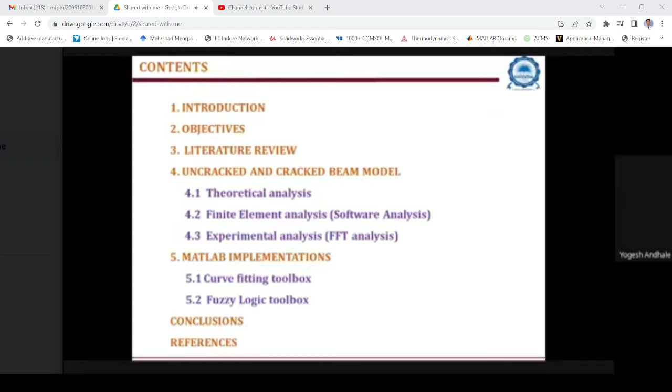So these are the contents of my presentation. Let's see one by one.

First, introduction. Beams of different materials like aluminum, iron, steel, and fiber reinforced composite material are widely used for structural purposes in civil, mechanical, and other engineering applications.

Crack or damage is an important phenomenon which needs to be studied closely for the safety of structures. The presence of a crack in the structure reduces the stiffness of the structure, which in turn reduces the natural frequency of it.

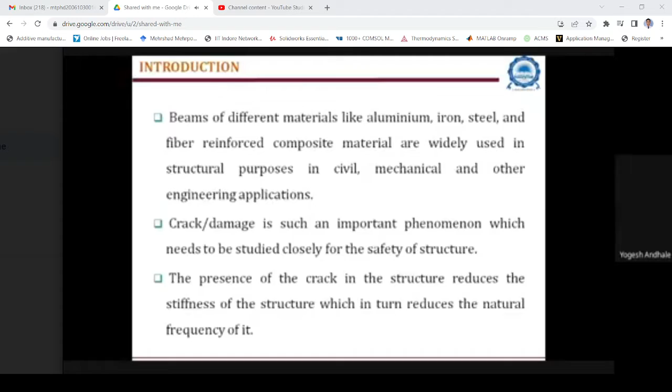The number of cracks present in the structure, the position of those cracks, and depth of the crack are the important parameters that change the natural frequency of it.

Detection of crack is necessary to ensure that the structure is free from any defect or not. Various techniques are adapted for the prediction of crack location, crack depth, and crack size.

The finite element method is considered as a mathematical tool for the analysis of complicated structures. In this study, a total of 10 beam models have been studied for natural frequency analysis, having different crack depth and location, calculating the natural frequencies of various beam models using Euler's beam theory, FEM, and FFT analyzer.

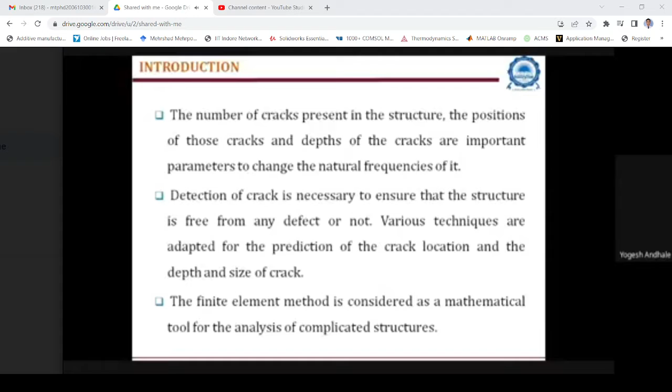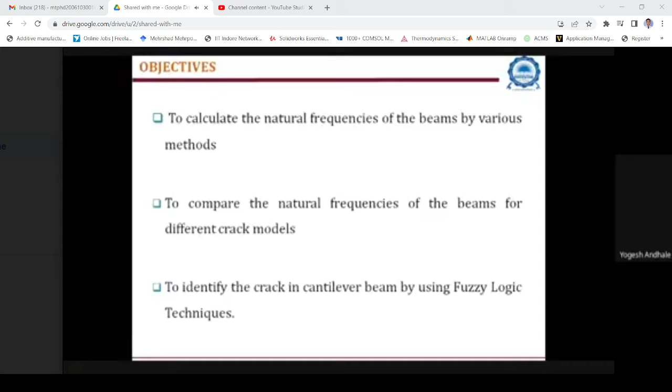These are the objectives of my project: to calculate the natural frequencies of the beams by various methods, to compare the natural frequency of the beams for the different crack models, and last, to identify the crack in a cantilever beam using fuzzy logic techniques.

This is the literature review. First, Pawar et al. used the genetic fuzzy system for damage detection in beams and helicopter rotor blades. The merit is that genetic fuzzy logic is an alternative to other techniques, and the demerit is that it gives only approximate solutions.

Similarly, Nahvi et al. in 2005 used crack detection in beams using experimental modal data and finite element models. Charanjena et al. in 2012 used fault detection of a single crack beam by theoretical and experimental analysis.

The merit of this methodology is that he located the size and depth of the open crack in the beam and used different end conditions. However, he did not use FEA analysis.

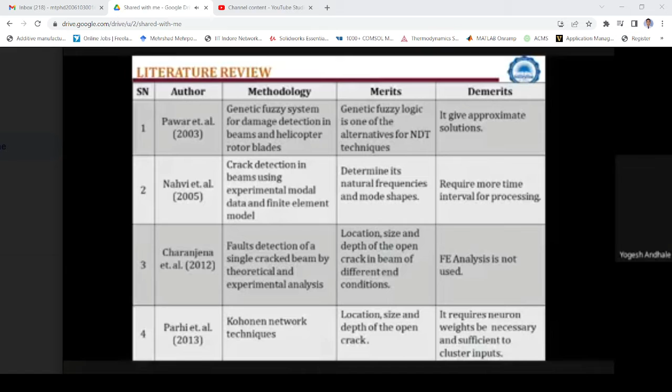Parhi et al. in 2013 used Kohonen network techniques to get the location, size, and depth of the open cracks. The demerit of this methodology is that it requires neuron weights to be necessary and sufficient to cluster the inputs.

So these are the uncracked and cracked beam models. You can see here the cantilever beam with the transverse edge crack is clamped at the left end and free at the right end, with some cross section and length, as shown in figure 1 and 2 — uncracked beam and cracked beam.

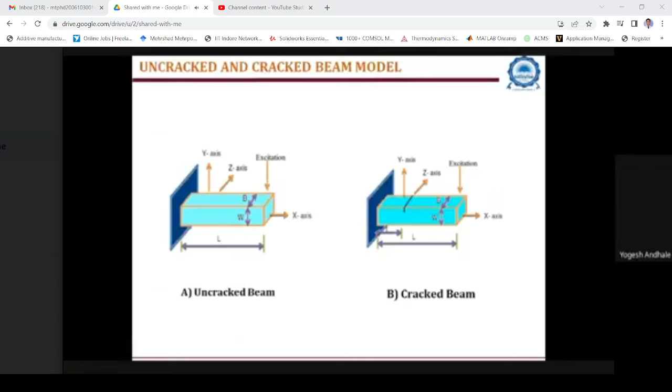In this particular case, the crack is assumed to be an open surface crack and damping is not considered. This is the general equation for transverse vibration using Euler's beam theory.

Here E stands for the Young's modulus of the material, I is the moment of inertia, A is the area of cross section, and L is the length of the beam. C is the constant depending on the mode of vibration.

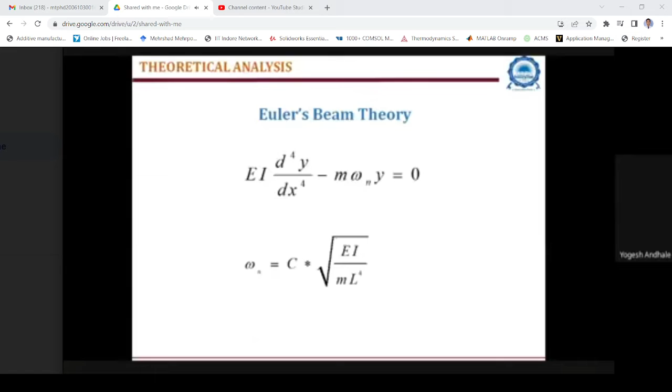The constants are C1, C2, C3. The C1 value is 0.56, C2 value is 3.52, and C3 value is 9.82. By using this equation, I found the different modes for the cantilever beam.

10 models have been studied for the natural frequency analysis, having different crack depth and location, and I calculated the natural frequencies and mode shapes for the beam models using the beam theory equation.

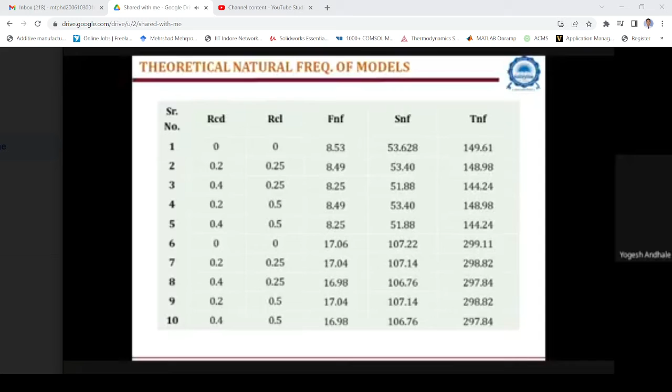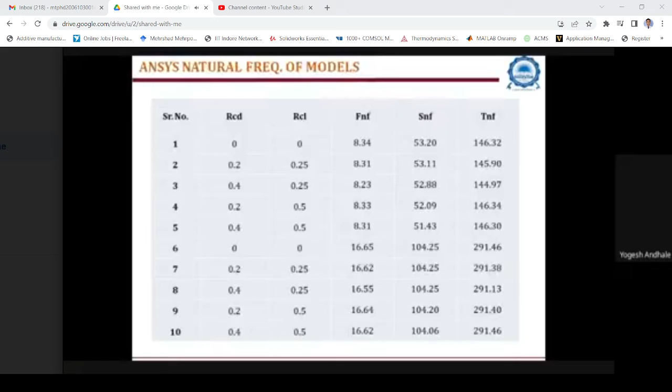Next, I used FEM or FE analysis to calculate the natural frequencies, and these are the results of FE analysis. Similarly, I used an experimental setup to calculate the natural frequencies, and these are the results.

So you can see the comparison of natural frequencies by three methods: theoretical, FEA, and experimental analysis. I used 10 models and calculated RCD, RCL using the first, second, and third natural frequencies for the three methods.

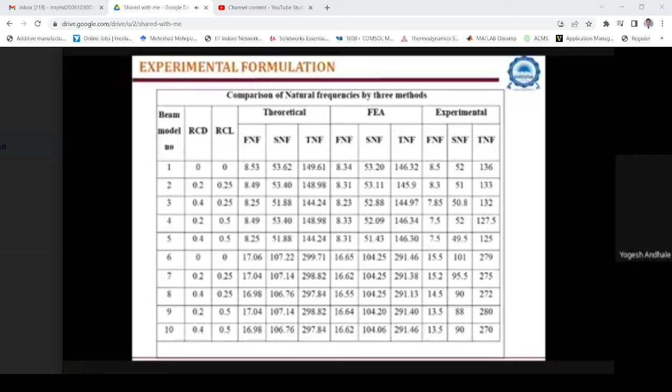Next, I used the fuzzy interface system. In that, the input is different modes of natural frequencies to the fuzzy interface system, and the output is crack depth and crack location.

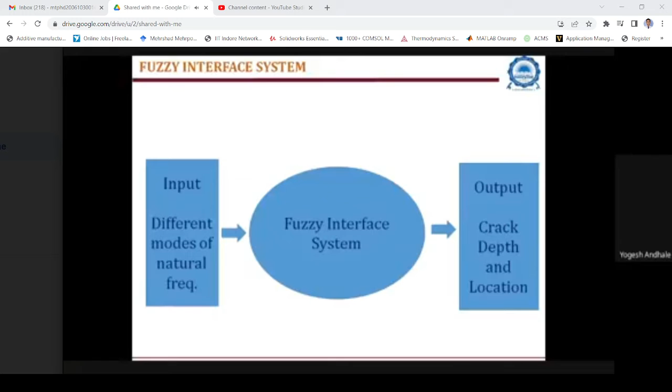The steps for the fuzzy model are: first, fuzzy inputs; second, apply the fuzzy operator; third, apply the implication methods; fourth, aggregate all outputs; and last, defuzzify.

So here is the fuzzy controller. I give the first, second, and third natural frequency as input, then it gets fuzzified, then the fuzzy controller applies if-then rules, then defuzzifies, and I get the output: RCL and RCD, that is relative crack location and relative crack depth.

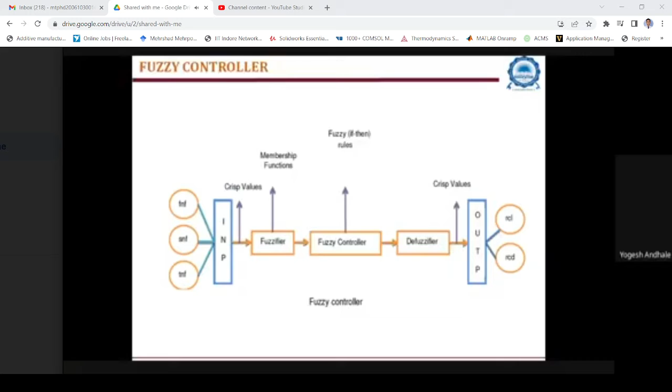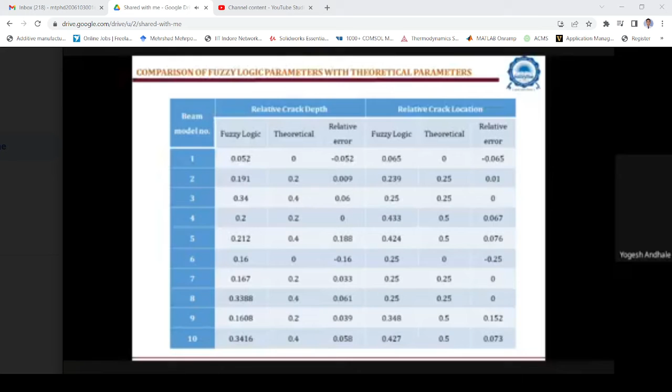These are the comparisons of fuzzy logic parameters with the theoretical parameters. We can see the results are mostly the same between theoretical and fuzzy logic, with some relative error of 0.052 or 0.009, but results almost match each other, with less than 10% deviation.

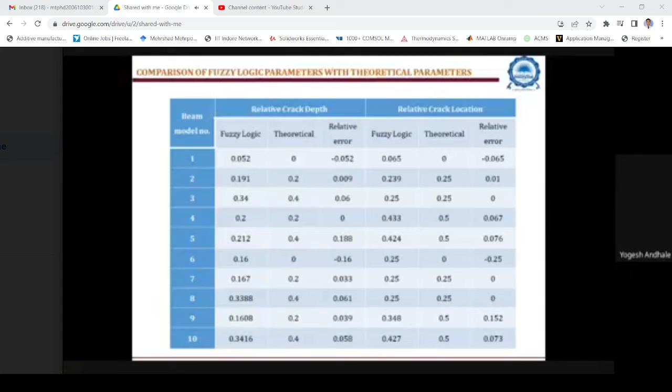In conclusion: calculation of natural frequencies of the beams was carried out successfully. Comparison of natural frequencies obtained by the three methods was done successfully. And last, crack can be identified by using the fuzzy logic technique.

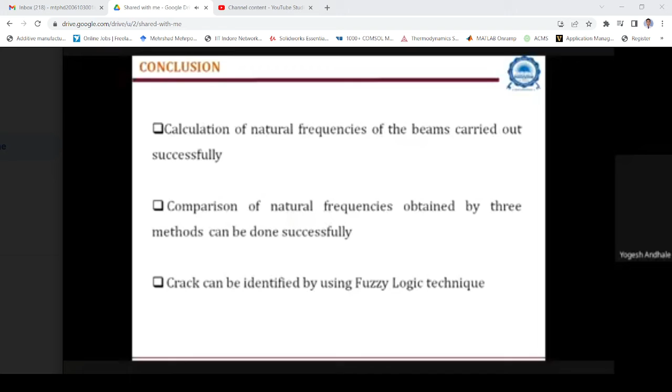And these are the references I have used. Thank you.

So, Yogesh, you have presented the work. Is this your MTech work or what? MTech, sir? MTech work.

Okay. So, all figures and tables you have used in this study are from your own work? Yes, sir.

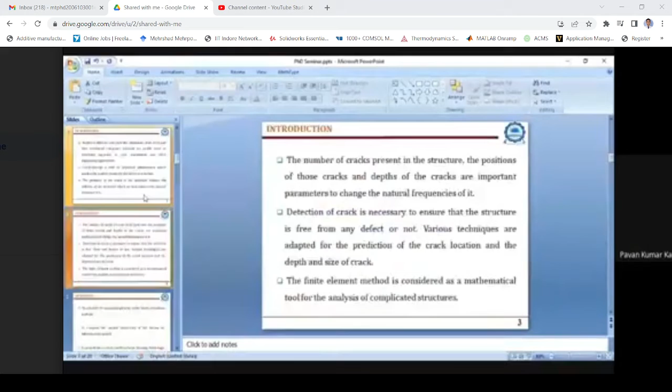Okay, fine. So the one where you are showing the cantilever beam, go to that figure. Have you drawn that? This one? Yeah, this one. Have you drawn these figures? No, sir, I used them from the papers.

So that's what I'm saying — you have not given any reference. So please be careful about it. Okay, yes sir. Otherwise, it is okay.

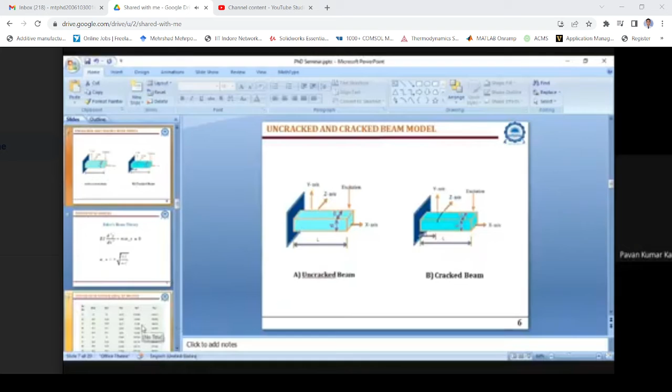Jatin, do you have anything to comment? No sir, you commented on this already. I was also going to say this. Okay, yes, thank you.